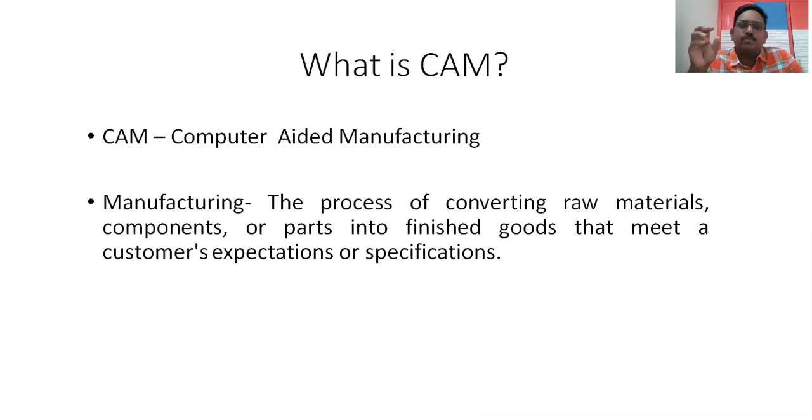So manufacturing means you will have so many activities. Manufacturing is not a simple thing, it's a complex activity which involves a wide variety of activities, such as product design. Whatever product we want to make, you have to design it first. So suppose if I want to make a chair, or otherwise if I want to make

a table, we need a product design. What are the dimensions of the product? What are the specifications of the product? That you have to do first. Without doing product design, we can't proceed to manufacturing. So the first one is product design.

Second one is, in order to produce things, we need machinery and tooling. With the help of machines and tools, we will manufacture. Third one is process planning, that means how to manufacture. That means before manufacturing, we need a sequence of operations.

For example, if I want to make a table, we can get the table only after cutting the wood. So wood cutting is the first process. In order to cut the wood, we will take the dimensions from the product design, and then we will cut accordingly. Wood cutting should be the first one, and after that, so many parts will be there. All these parts will be manufactured or produced with the help of machinery and tools, and finally we will assemble it.

So process planning is basically the sequence of operations to be performed. Next one is materials. Without materials, we can't produce any good. So what are the materials required? What are the raw materials or part materials needed is to be given here.

And purchasing. In order to get materials, we have to purchase, because every manufacturing industry will purchase goods or raw materials from various shops or companies. They will give quotations, and they will issue purchase orders, and thereby they will get the material. So purchasing is a process.

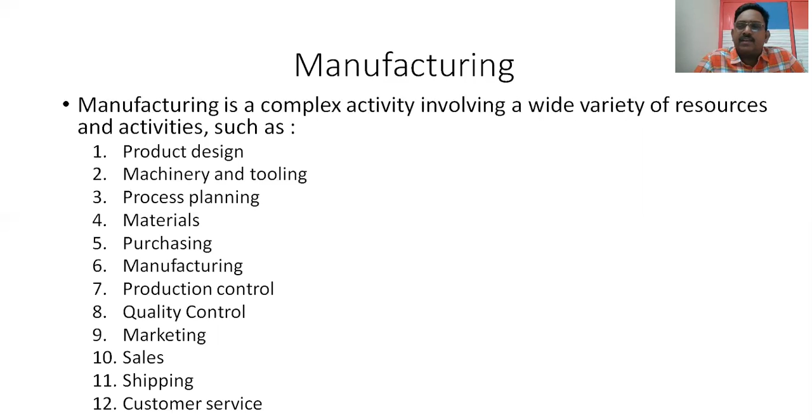That means once the customers are there, we have to transport whatever finished goods to the customer's place - so shipping. And finally, once after delivering our goods and services, it is a part of the manufacturing industry whether our goods are serving as per the customer's request or not. If there is any problem, or when the customers encounter any difficulty with the product we have supplied, then we have to give customer service.

So manufacturing is basically a complex activity which involves a wide variety of all these activities. So all these twelve activities come under manufacturing.

In the traditional manufacturing system, all these things are controlled by human beings, whether it may be purchase, material, product—all these things are controlled by humans, traditionally. But now...

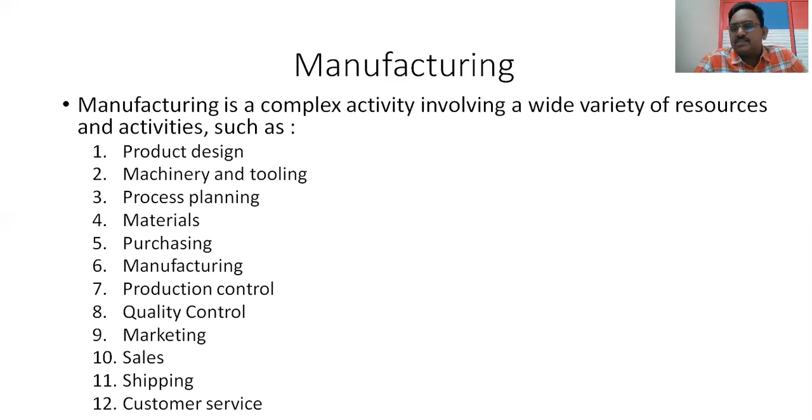For example, take a simple working schematic diagram. We place an order, suppliers send the raw materials, and these come to our manufacturing. In the shop floor, we manufacture the goods and it goes for quality assurance. That quality check takes place. Once quality is okay, it goes for packaging, and from packaging it goes into our godowns, that is storage. From storage we ship to the customers. So this is a simple manufacturing workflow.

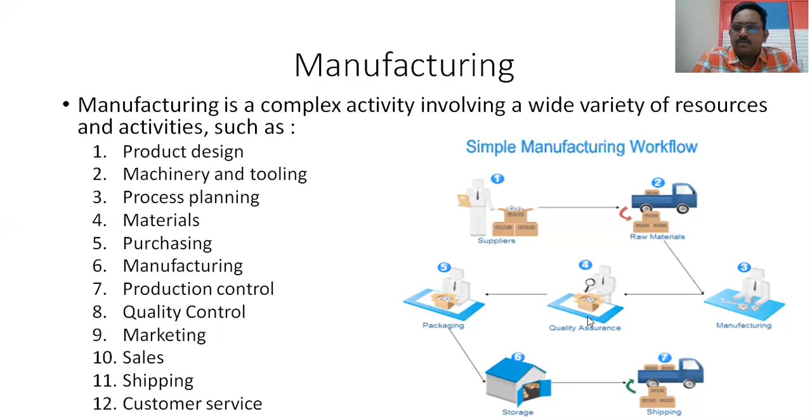So this is how it goes. So this is what manufacturing is. Hope you understand what exactly manufacturing is. Now we will come to our discussion, that is CAM.

As we said, CAM is computer aided manufacturing. It refers to, in general, computer aided manufacturing referring to the computer systems to plan, manage, and control the operations of a manufacturing plant through either direct or indirect computer interfaces with the plant's production resources.

As we said, in the traditional way, what we do, we control. That means human beings will control, whether it may be purchasing activity, marketing activity, shipping activity, or quality assurance activity. Who will check all these things? Who will carry them out? Only human beings.

Here we are replacing, to the maximum extent, human beings with the help of computers. That means, instead of me preparing a purchase order based on the stock in our storage, the computer automatically generates a purchase order. Our computer automatically gives a hint that yes, the stock is going to end. Therefore, in order to have continuous production, it will pop up with a message that yes, you have to place a purchasing order. Therefore, human errors and human involvement will be reduced with the help of this manufacturing, with computers.

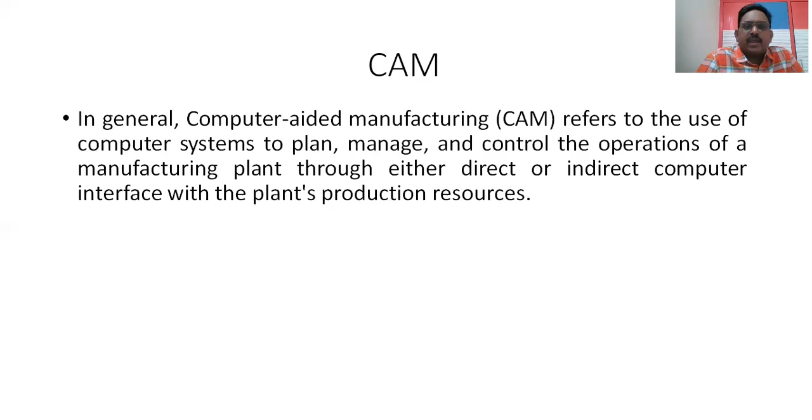So computer aided manufacturing often refers to the software. Basically, it is software that takes a geometric design authored through CAD software as an input. That means, as I said, in order to manufacture something, we need a product design. So product design is generally made with the help of CAD software. And whatever the product designed with this CAD software will be given as an input to the CAM, that is, computer aided manufacturing.

And with the help of this design, manufacturing instructions are automatically downloaded, and automated equipment such as computer numerical control machines, CNC machines, can read the CAD software, and accordingly plan how to manufacture. So this is what CAM is.

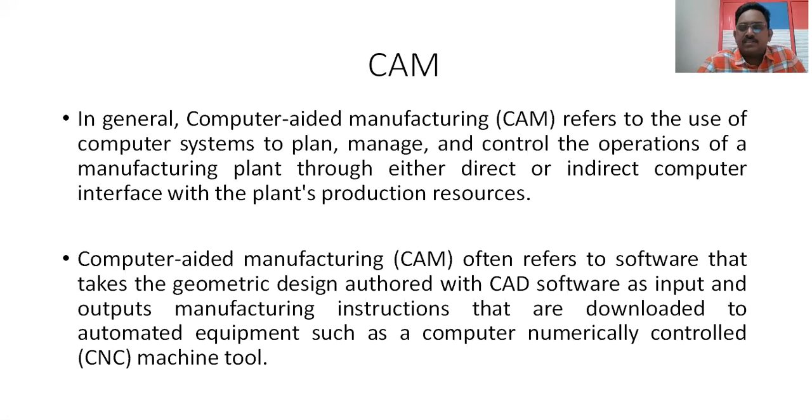So what are the functions? First of all, why should we introduce CAM? That means how it is different from traditional manufacturing. It should perform some functions. Unless it performs certain functions, there is no use of CAM, because already we have a traditional manufacturing system. Therefore, in order to have advantages with CAM, or if you want to deploy the CAM software, it has to perform certain functions. What are those functions? Let us see quickly.

First of all, the introduction of CAM should improve productivity. Productivity means the number of products produced in a particular day or month should be increased. When compared to traditional manufacturing, by the introduction of CAM, you have to improve your productivity. That is the first function of CAM.

The second one is, it should integrate various aspects of the manufacturing operations. As I said, manufacturing is a complex process, and it involves so many activities. If there is no coordination between these things, you can't produce the goods in a good manner. For example, if you want continuous production, we need to have stock in our store.

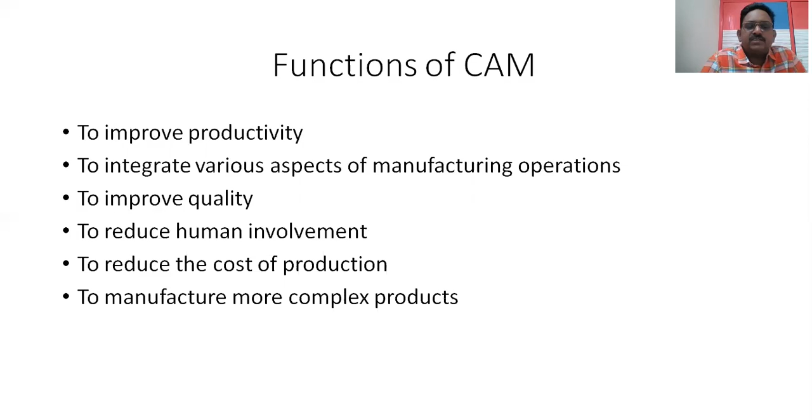Next function is to manufacture more complex products, for example the design of a nano material, or IC circuits. These are very difficult to produce with human beings, since they require tolerance of plus 0.0003 mm. It's very difficult for a human being to maintain that tolerance.

So it should manufacture more complex and higher quality products. Therefore, another function of CAM is to manufacture more complex products and to be more flexible in manufacturing. In traditional manufacturing, flexibility is generally less, because the operator is accustomed to one kind of set of operations, and will only be good at those things.

That's why in traditional manufacturing, flexibility is generally not up to the mark. Whereas in CAM, since it's a computer, it can automatically adjust according to the design, for example if the diameter is increased. So CAM is more flexible compared to the traditional manufacturing system.

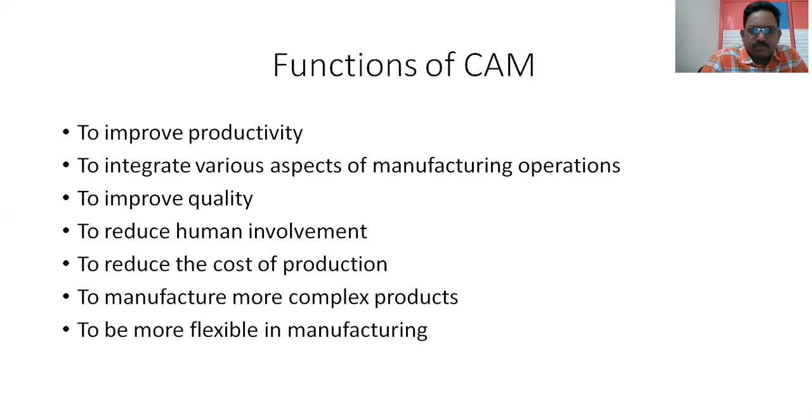Now we will go for the benefits of using CAM, computer aided manufacturing. One of the main reasons we introduce CAM is greater speed in producing components. As demand for various products increases due to heavy population or the latest trends, we have to produce in large quantities and at a quicker rate. Otherwise, other companies producing at a quicker rate will attract customers instead. Therefore, greater speed in producing components is important.

The second advantage is greater accuracy and consistency, with each component or finished product being exactly the same. Generally when we manufacture manually, suppose I want to produce a shaft of 20 mm diameter. The first time, using a lathe machine, I may get a tolerance up to 0.1 mm, but the second time it's not sure I will get the same tolerance. Sometimes I may manufacture a 21 or a 19, because as a human being I have limitations.

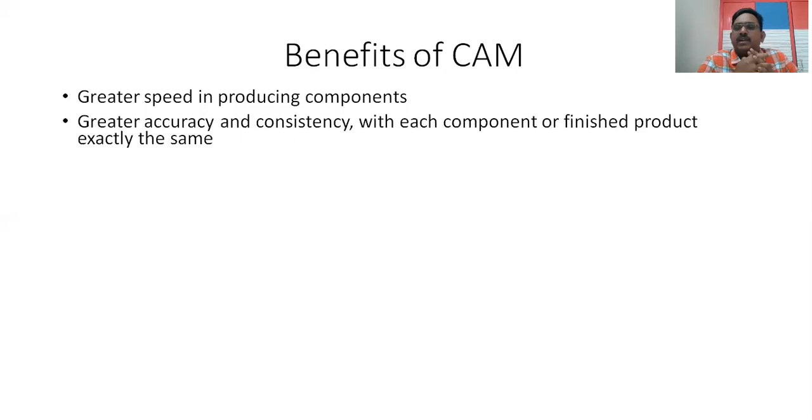Greater efficiency — that means the efficiency of the machines will be more, and the final product will be more accurate in terms of tolerances, surface finish, and other such factors. So efficiency will be more.

Next, we can produce items quicker due to short lead times. For example, lead time is the time to set up before starting. For instance, I want to perform a drilling operation.

So in order to perform a drilling operation, the drilling itself may take only 1 or 2 minutes. But to make that drill on a particular job, we need some setup. Setup means I need to fix the workpiece and locate the point where I want to make the drill, using punches to mark the point, and jigs and fixtures to perform the drilling operation. The drilling operation itself may take only 1 or 2 minutes, but the setup time will take much more, maybe even 10 to 20 minutes. So this is lead time, meaning the setup time which does not involve actual production.

The next benefit is less chance of products malfunctioning, meaning less chance of errors. As I said earlier, in traditional manufacturing there is always a possibility of human errors, where the product may not go through proper tolerances, leading to possible malfunctioning. Whereas if we use computers, there is less chance of this—I cannot say there is completely no chance, but there is a lesser chance for the product to malfunction, because the machine, with the help of codes, performs accurately. So this is one more benefit of CAM.

The next benefit is that CAM can create more complicated products and unique shapes, which is not possible with human beings. For example, more complicated things like IC chips using nanotechnology, with dimensions in the range of 10 to the power of -6 to 10 to the power of -9—it's not possible for a human being to make such intricate, complicated, and complex shapes. So with the help of CAM, we can create these more complicated products and unique shapes.

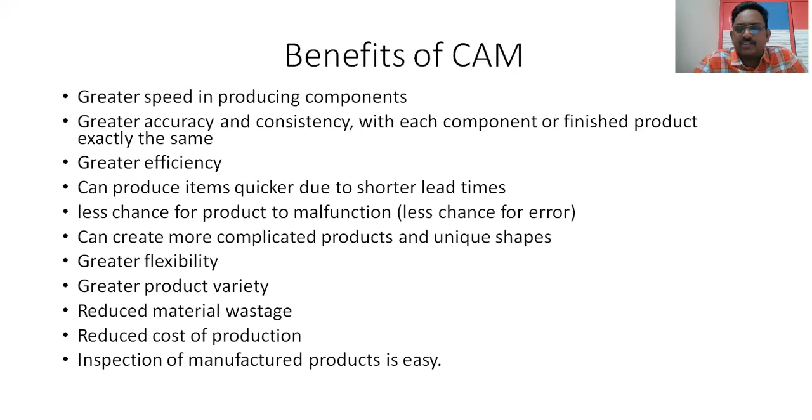Cost of production is reduced not only because of reduced material waste, but also because of lesser lead times—within the same time, we can produce more products, reducing the cost of production. Also, inspection of manufactured products becomes easy. With the help of robots or cameras, which computer aided manufacturing involves, we can inspect manufacturing products in a better, easier, and more accurate manner compared to the traditional manufacturing system.

Finally, what we can say is better communication interfaces and greater understanding among engineers, designers, drafters, management, and different project groups. Definitely, coordination will be very easy with the help of computers. Traditionally, the biggest task is coordinating with them. If we don't have proper coordination between production department, purchase department, stores, sales, inspection, then it is very difficult to produce goods and to supply to the customers and to get the raw materials. So all this will be done with greater difficulty without computers. But with the help of computer-aided manufacturing, better communication can be performed, interfaced with greater understanding among all these departments. So these are the benefits of CAM.

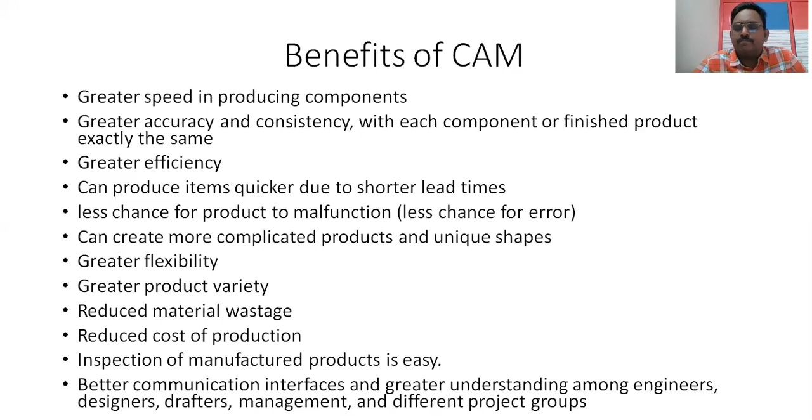Work can be lost because of the sudden breakdown of computer systems. Yes, because we are depending on computers, and computers only give instructions to the machines. So in case of breakdown of computers, what happens? The entire production will collapse. So it is very important that whatever company or industry is using computer aided manufacturing, they see that there won't be any breakdown. In case of breakdown also, they should have standby systems so that production will not be stopped. So this is a very important thing.

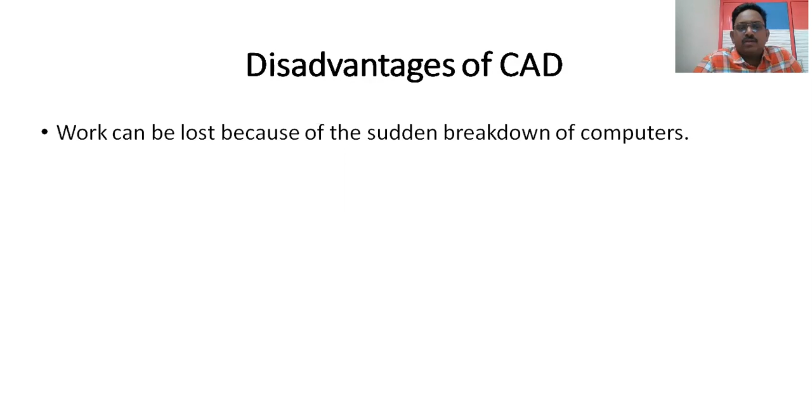Time-taking process to know how to operate or run the software. This is very important because it is related to computers and involves various operations with the help of keyboards and buttons and all these things. In the traditional way, we can easily understand what is a tool and what the things are, but it will be difficult to understand the software. Various codes they use, various methodologies they adopt, all these things. Definitely it will take time to know how to operate or run a software or a machine using computers. So it will be difficult for us, and the initial time for understanding these things will be more.

High production or purchasing cost for new systems, softwares and machines. Definitely, an ordinary lathe machine's cost is much less than a sophisticated CNC lathe machine, because it involves computers, latest technologies, tools and all these things. Therefore, when we want to use manufacturing with the help of computers, we have to have new computer systems, machinery and new softwares. Not only hardware - both hardware and software are needed, and these softwares are also very costly. So the initial investment using CAM software will be more, as the cost of the systems, softwares and machinery is very high compared to traditional machines and tools.

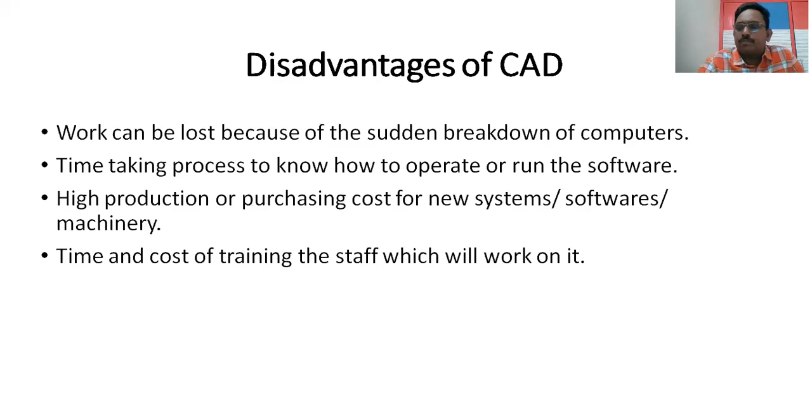Now we are going to a new topic called CAPP. What is CAPP? CAPP means computer aided process planning. So what is computer aided process planning? Let us go through it. CAPP is the use of computer technology to aid the process planning of a product part or a product in manufacturing. So basically what is CAPP? As it indicates, it indicates two terms: computer aided process planning. So process planning is there - even for traditional manufacturing, we will have process planning. But here we use computer aided. So if we use computer technology for this process planning, then it is called computer aided process planning.

Process planning is concerned with determining the sequence of individual manufacturing operations needed to produce a given part or product, along with tooling, fixtures, machinery and assembly. For example, we may need drilling, milling, welding or joining operations, and assembling, for which we need tools, fixtures, jigs and machinery, arranged in a sequential manner. So process planning is basically concerned with the sequence of individual manufacturing operations in order to produce a given part or product.

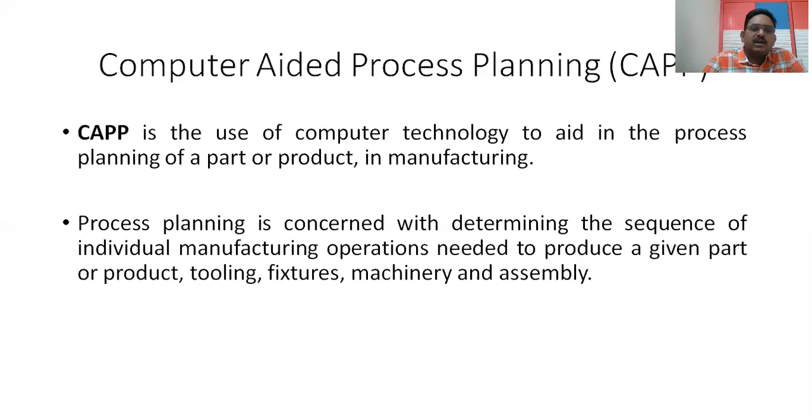Now let us look at the steps involved in process planning. First, we know the design specification. Once we have the design specification, we analyze the parts required, going through the analysis of requirements and selection of raw workpiece, the raw material on which we have to perform the operation.

Next is determining the manufacturing operations and their sequences. So in order to make the part as per the design specifications, we decide what various operations are needed, such as drilling, milling and other operations. Once we fix the various operations and their sequence, then for each operation we select the machines and tools to use.

Once we select the machines and tools, then we have to select the work holding devices like fixtures and jigs, and inspection equipment. So first design specification, then selection of raw workpiece, then the sequence of operations, then based on the sequence of operations, selection of machine tools, and based on the machine tools, selection of fixtures, inspecting materials and all this.

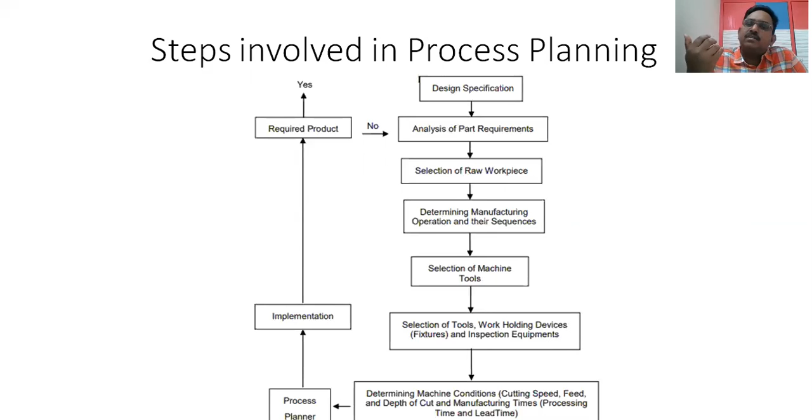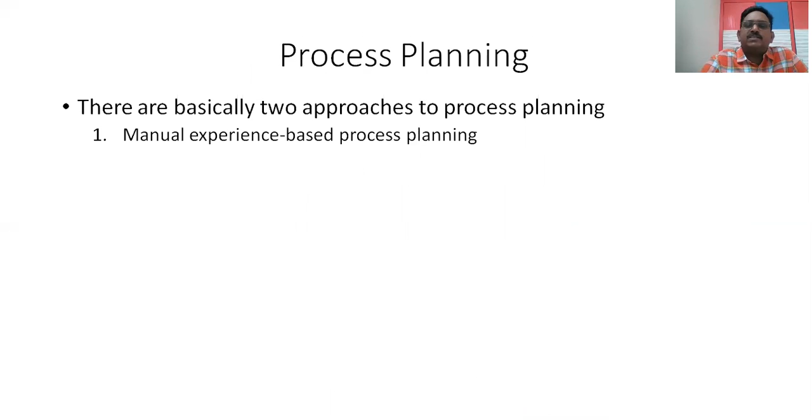This applies for either traditional manufacturing or with the help of CAPP, that is computer aided process planning. So there are basically two approaches in process planning: manual experience based process planning, or computer aided process planning. In manual experience based process planning, the process planner plans based on his own experience.

You might have experience on the production or shop floor for 10 to 20 years. Then obviously you will have an idea of the sequence of operations, the tools, the machinery used, and the inspection equipment, jigs and fixtures. So he will be doing that based on his experience - this is manual experience based process planning.

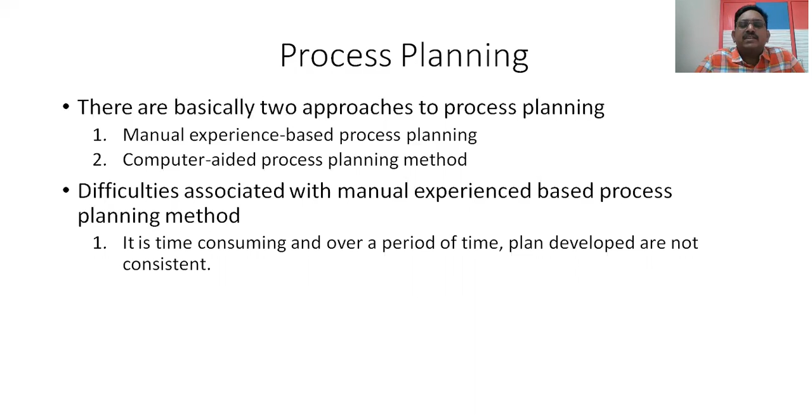But difficulties with manual process planning: it's time consuming, and over a period of time plan development is not consistent. It basically depends on the process planner who plans based only on his experience. He may not be exposed to different process plannings - he might have some ideas, but he cannot go through all those things which he is not acquainted with. Therefore, it is a time consuming and inconsistent process.

Next, the feasibility of process planning depends on many factors such as design and availability of machines. Suppose I could use a sophisticated milling machine - then it is easy for me. But if it is not available, I cannot include it in the process plan. Therefore, it depends on design, availability of machine tools, scheduling and machine tool allocations - these are the difficulties.

Therefore, in order to generate a proper process plan, the process planner must have sufficient knowledge, experience and skill. If the process planner is good, then your process planning is good. If your process planner is not good, then the process planning will not be good.

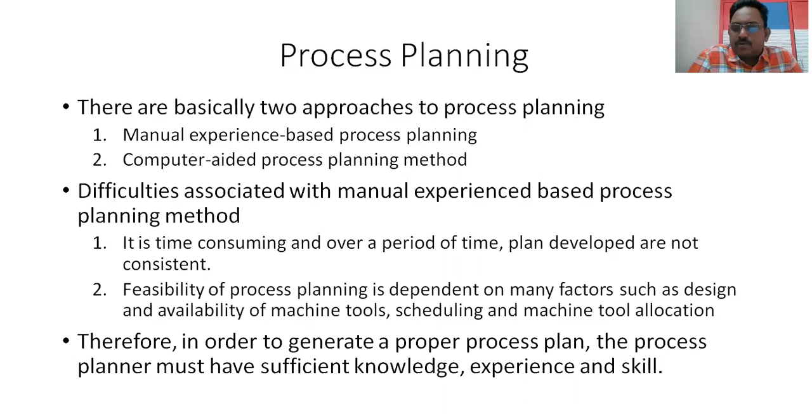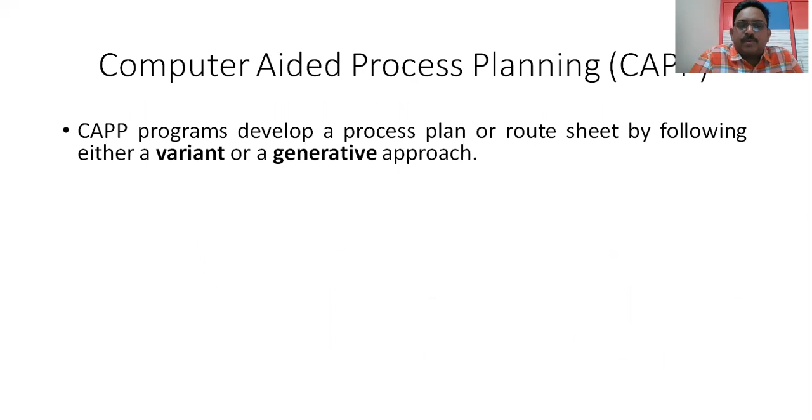So it all depends on the skill, experience and knowledge of the process planner. This is process planning. Computer aided process planning, CAPP programs develop a process plan or route sheet by either a variant or generative approach. Here, computer only will do process planning. There are two approaches: one is variant approach, the other is generative approach.

Variant approach is an approach that uses a file of standard process plans to retrieve the best plan after reviewing the design. That means it will have certain designs and certain process plannings in its file. Based on your requirement, it will search which process planning meets your requirement among the various process plannings in the file. This is called variant approach.

The computer will select the best out of the various plans we have. This is not possible with a traditional process planner, as a traditional process planner may have only one or two process plannings, but the computer can use a number of process plannings in the file. We will have standard process plans, and based on searching those, it will select the best.

The second one is generative approach. Generally, when we go with a new product design, we will start preparing a new process plan. This is the generative approach to CAPP. Generative approach means we will not retrieve the process plan from the plans we have in the file; we will generate a new process plan according to our requirements.

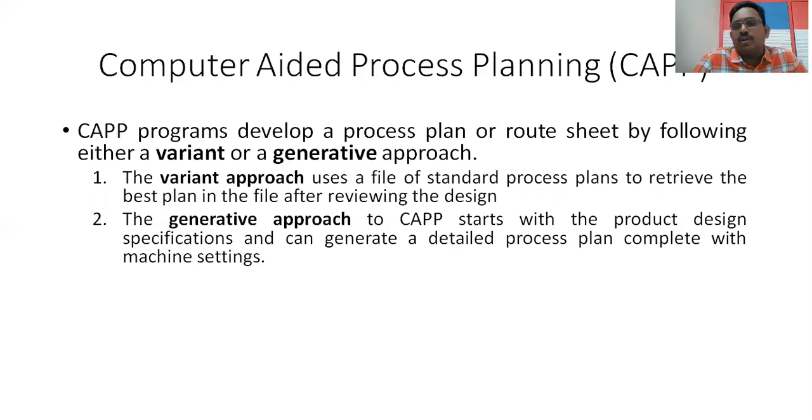So computer only will, based on the product design and the requirements of the end product, generate a new process planning based on various operations that are to be performed. So CAPP systems use design algorithms, a file of machine characteristics, and a design decision logic to build the plans. How is this generative approach done? Based on the design algorithms, a file of machine characteristics, and a decision logic to build the plans.

Therefore, between CAD and CAM, after CAD we should implement this. So CAPP is basically the most critical link between CAD and CAM. Whatever product we have designed can be manufactured if we have gone through proper process planning with the help of computers. So computer aided process planning is a very critical link to integrate CAD and CAM.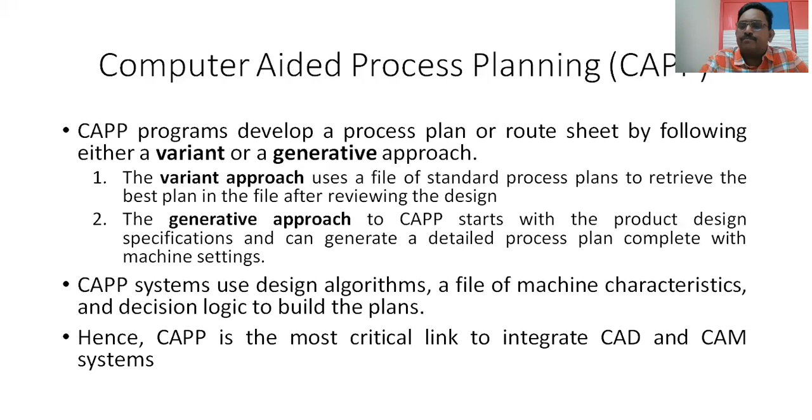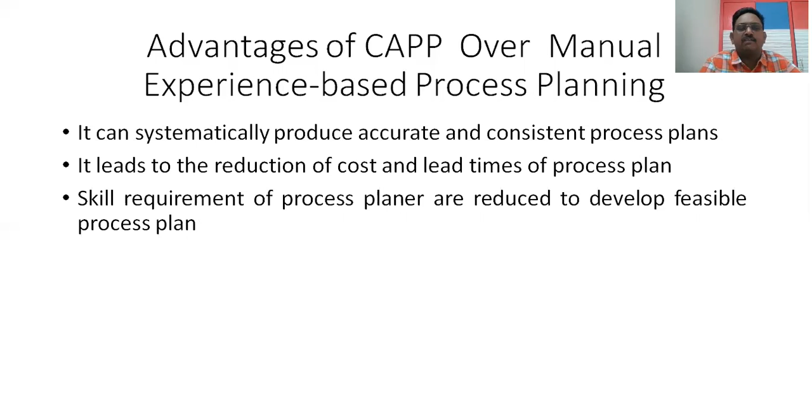So, advantages of CAPP over manual experience-based planning: it can systematically produce accurate and consistent processes. This leads to reduction of cost and lead times of the process plan. Definitely, it will reduce the cost and lead times. The skill requirement for process planning is reduced to develop a feasible plan, so the involvement of the manual process planner is reduced so that he can do some more work.

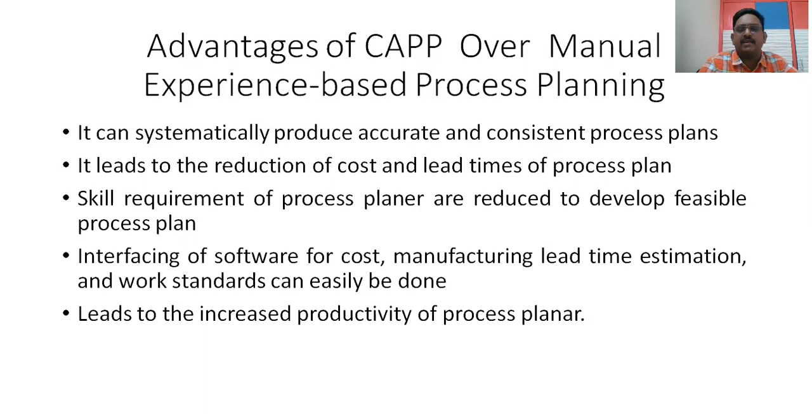For this purpose, interfacing software for cost, manufacturing, lead time estimation, and work standards can easily be done. Because we are using computers, all these things like cost, manufacturing, lead time estimation can easily be handled with software, leading to increased productivity of the process planner. Yes, the process planner can do better process planning with the help of computers compared to the traditional process.

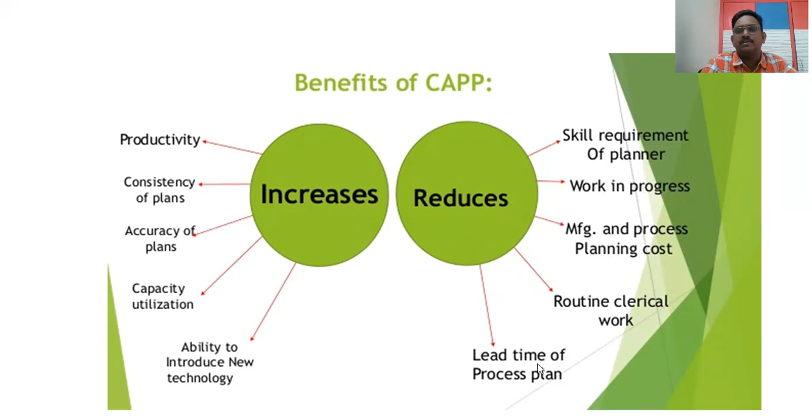So in short, we can see the benefits: with the help of CAPP, it increases productivity, consistency of plans, accuracy of plans, capacity utilization, and ability to introduce new technologies. It will reduce skill requirement of the planner, reduce work in process, reduce manufacturing and process planning cost, reduce routine clerical work, and reduce lead time of the process. So this is something about CAPP.

These are the important things I would like to share. In this video, we have seen what CAM is and how it is different from the traditional manufacturing system, what the functions of CAM are, and also the benefits and disadvantages of CAM, and also computer aided process planning. In this CAPP, we have seen how it is different from traditional manual-based process planning, and what are the benefits and advantages we have with computer aided process planning.